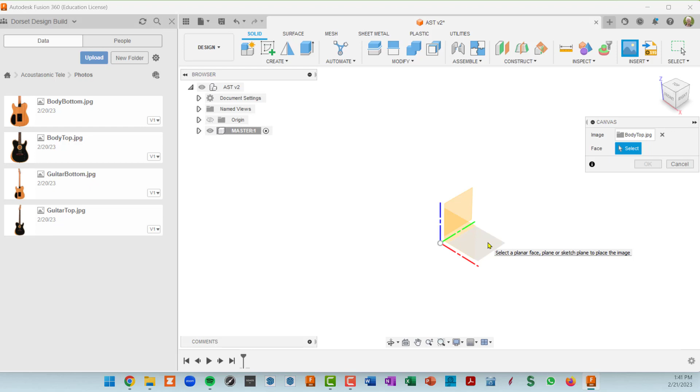So all I've got to choose from at this point is one of these 3 surfaces adjacent to the origin. I'll click on this top surface, scale it up so we can see it, and click OK.

But look what happened here - this canvas is not inside the master, it's inside the top level component. So I think to work around that, we're going to have to make something in the master that has a surface on it, and then use that to attach the canvas to.

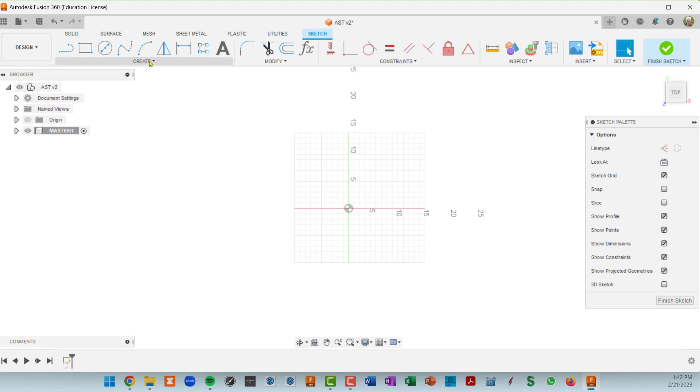So I'm going to undo a couple of times. We still have our master component, and I'll close down the data panel. I'm going to create a sketch here within the master component, and we'll do that on this same top plane. We get spun around here - there we go. And I'm going to create a rectangle, actually a center point rectangle.

I'm just going to roughly make this the size of the blank that we would need to cut this out of - size really isn't important here. I'm going to make it, let's just call it 14 by 20. By the way, I am in inches here. You can change your default setting in document settings, but I've got it set to inches.

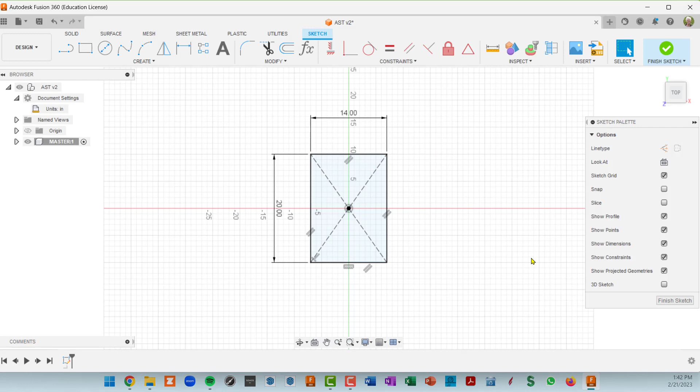Okay, so we now have a sketch. Let's open up our master, open up sketches, and double click on that slowly. I'm just going to call this temp - this is our temporary sketch just for the purpose of getting that canvas inside the master level component.

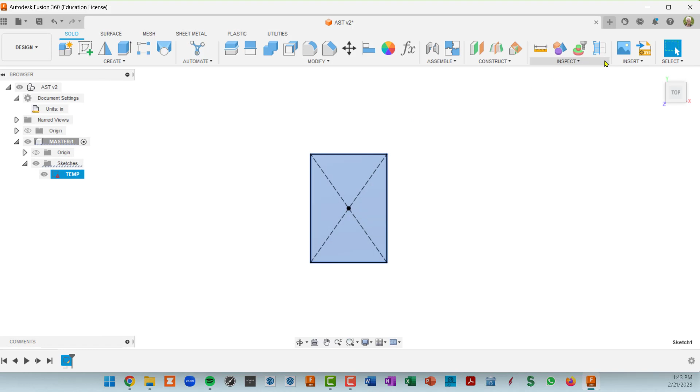So I'm going to finish the sketch, and now when I go to insert canvas and pick my body top image, I can select this surface right here. And when I do that, you'll see that we get something that is actually fairly well scaled to the rectangle that we just made, which is convenient.

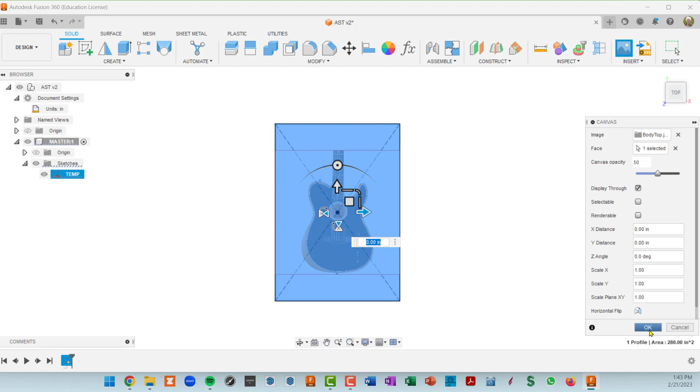So I'm going to go ahead and OK out of that, and we'll see now we have a canvas folder inside the master. So that's exactly what we wanted.

Now, the first order of business on the canvas is to scale this appropriately. And to scale a canvas, you right-click on it and go to Calibrate.

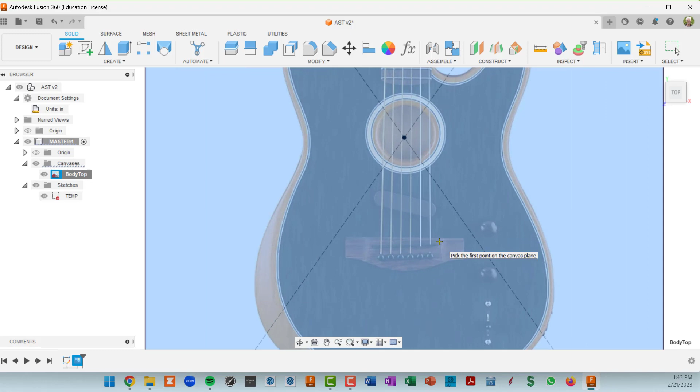Okay, and now I can zoom in, and I need a known distance in this photo. I think the distance I'm going to use is the string spacing at the bridge. So I can clearly see the strings, and I'm going to click here on the low E string where it intersects the bridge, and on the high E string where it intersects the bridge.

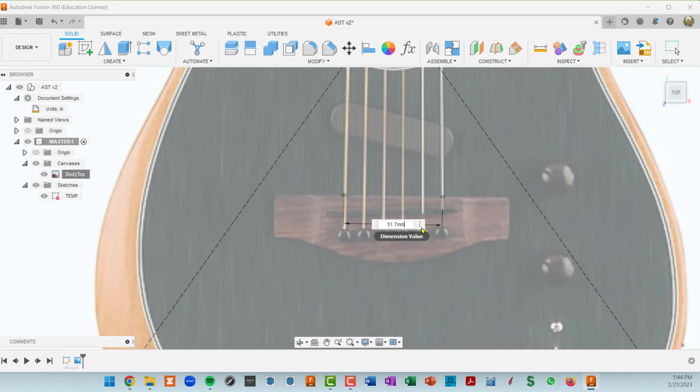And then I looked up ahead of time what this was supposed to be, and it's supposed to be 51.7 millimeters. So I've got to put millimeters in because our default value is inches. So that scaled things up.

And now let's take a quick look and see if that is anywhere in the ballpark.

And one thing we know is that this is a 25.5-inch scale guitar. I want to do a quick aside here.

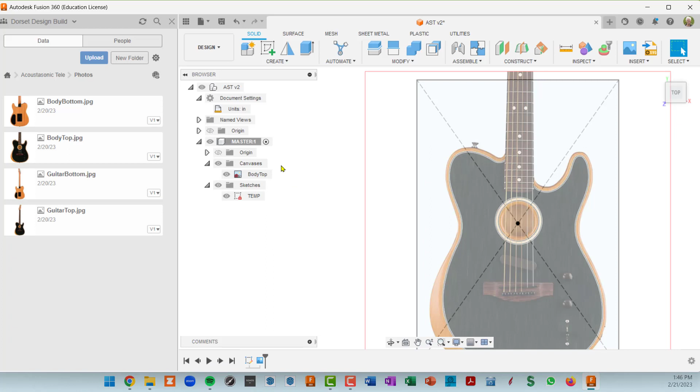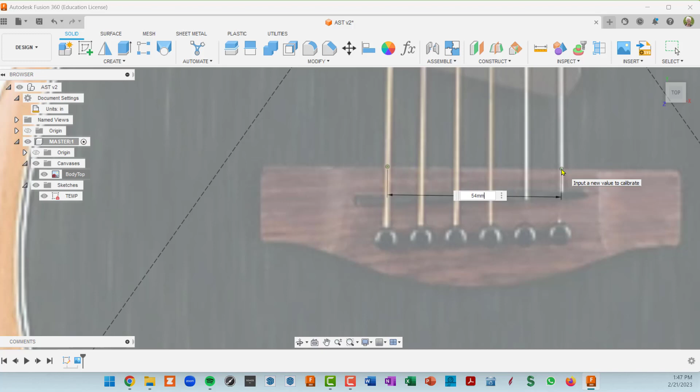Let me minimize this and go back to our Fusion file to recalibrate. I'm going to close the data panel and recalibrate the canvas. I right click on the appropriate canvas, pick calibrate, zoom in, and go from this low E string to this high E string, kind of the center of each. I'll type in 54 millimeters and press enter. That scaled things up a little bit more.

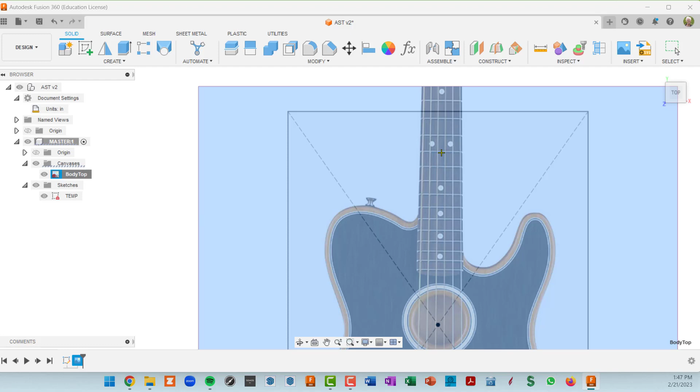What I want to validate here is that half the scale length should be the measurement from the 12th fret to the bridge. Let's go through the motions of doing a calibrate, but not actually apply it. I'll click on the middle of the 12th fret and go down, probably right here would be considered the start of the bridge. That's 12.85. We would want 12.75, half of that 25.5 scale. So that's pretty darn close.

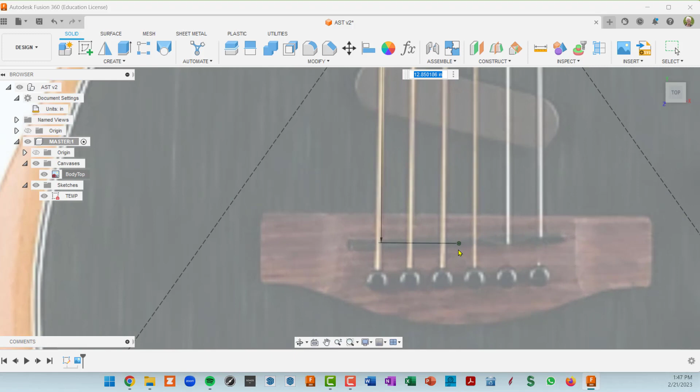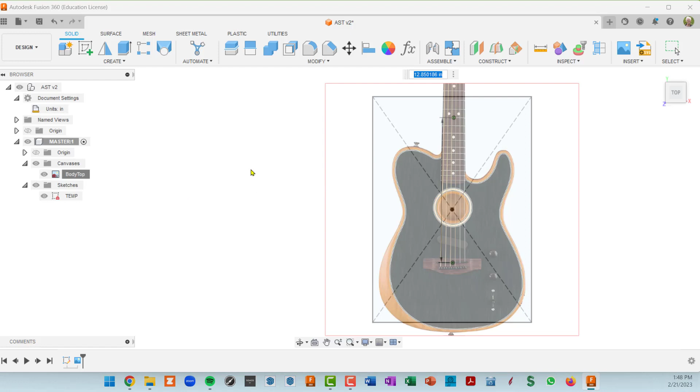So I'm going to stay with that scaling. This scaling is just for the body, so it doesn't have to be extremely accurate, but we will be extremely accurate when we get into fret spacing and how the neck aligns with the bridge, or vice versa. I'm going to hit escape, and we're not going to do that recalibration.

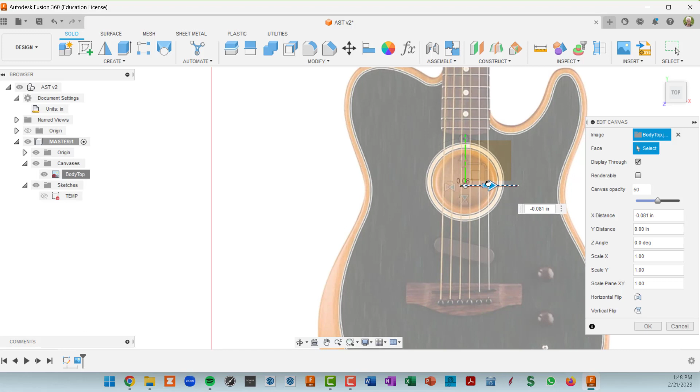Now let's hide our temp sketch and make a new sketch. Let's turn on our origin. You can see here that this guitar is not centered horizontally, so I'm going to right click on the canvas, do an edit canvas, and use these arrows to move it so that it is centered. Vertically, I'd like to center this over the center of the sound hole, so I'll go ahead and do that. Now the canvas is positioned so we can draw over it.

So in order to do that, we're going to make a sketch. We're in the master level component, so that's where our sketch is going to go. I'll click on New Sketch and click on this top plane. Now I think what I'm going to do is start by making some little helper lines, and we may actually have to rotate this canvas a little bit, but let's start with the helper lines first. I'm going to get a line here, starting at the center and going straight down to end right here at the butt part of the body.

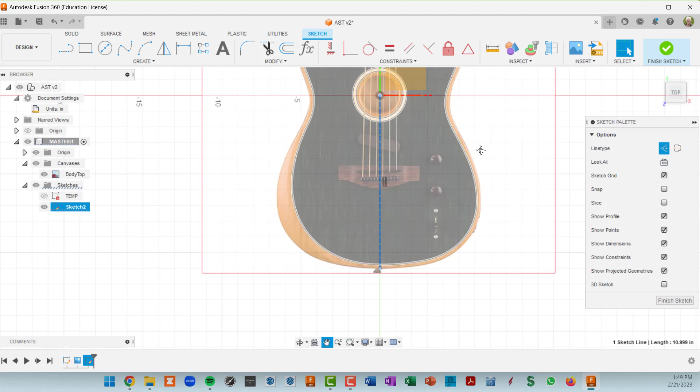I didn't turn on construction lines, so I hit Escape, click on this, press X - or I could have come over here and done it by clicking in the palette. But now I've got something that's a vertical line in our sketch, and you can see it kind of stays between the strings here, which is good. Let's do another one coming up from the origin, going straight up to this point, making sure that I am at 90 degrees, which you can see right here.

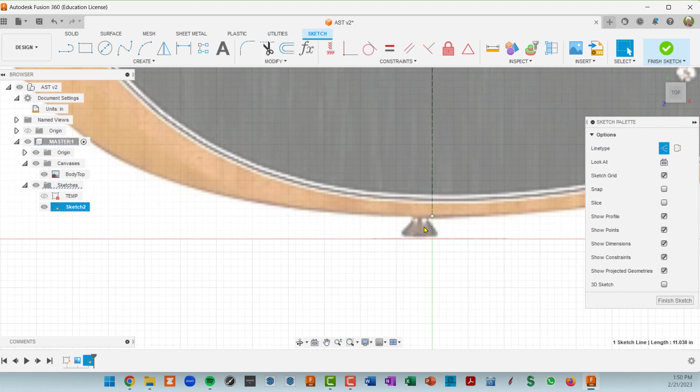Okay, I'm going to click on this and press X for construction. You can see that this is actually a little bit skewed, the canvas is a little bit skewed. It's right down the middle here, but as we come up here, it's a little off. Another thing that looks a little off is the strap peg is not quite in the center. That's assuming they put that in the center - I don't know, but I certainly would on my guitar.

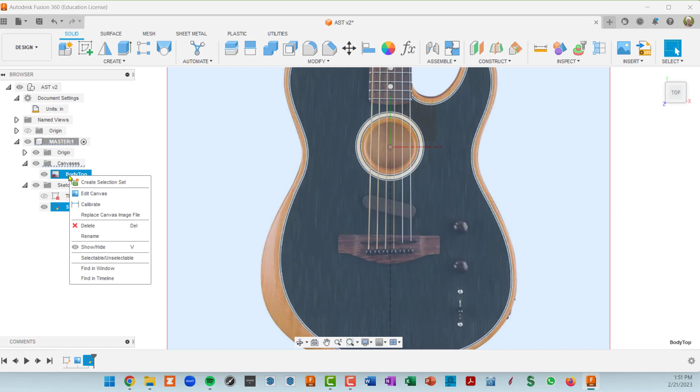So I'm going to rotate this canvas just slightly. Let's get out of our sketch, which has these two guidelines in it right now, and right-click on our canvas and go to Edit Canvas, and now we can do a rotation. But you'll see that if you try to do it with the control, it's going too fast. So what I'm going to do is just type in a very small amount here - let's say 0.5, half of a degree.

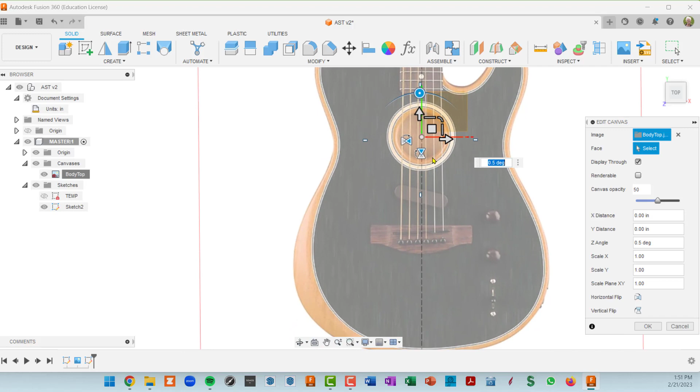And that looks much better here. We're going through the dots, we're still going through the strings, and it's actually not too bad down there. So I think I'm going to leave that. I'm going to OK out of that - so we did our slight rotation of the canvas.

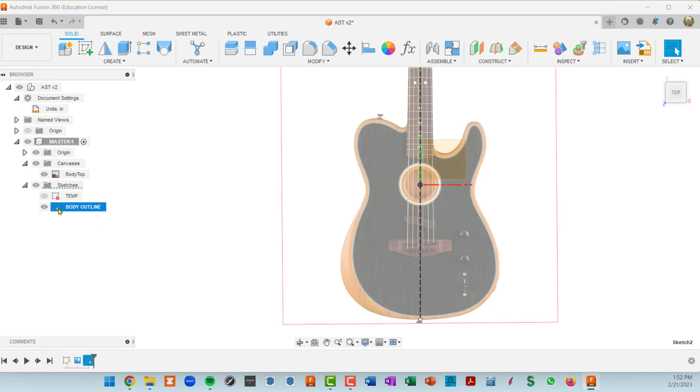Now, this was the sketch that we just put these two vertical guidelines in, so I'm going to slow double click on that, and I'm going to call this the body outline. All right, so we're going to go back into that body outline - I will double click on its little icon here to open up the sketch.

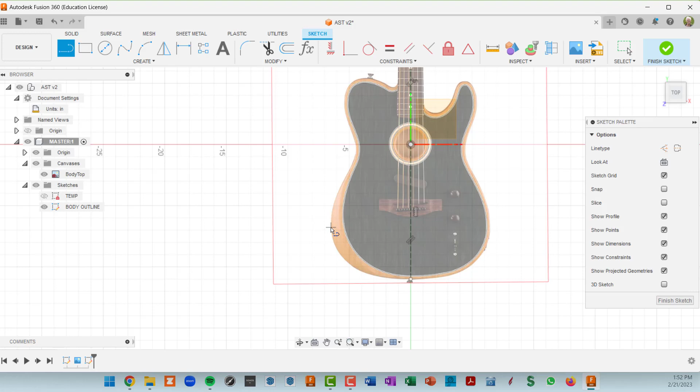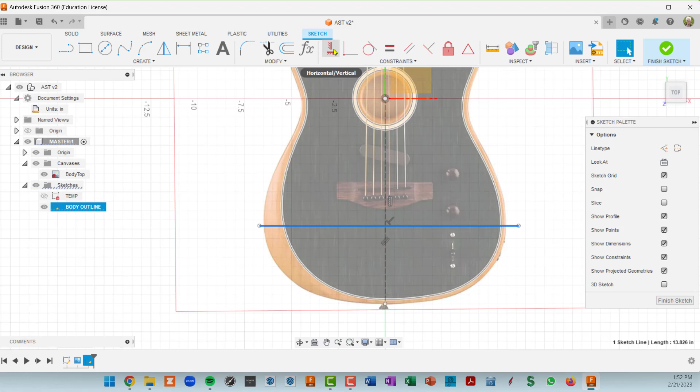What I like to do is add a bunch of guides. Better show you than babble here, but I'm going to get a line, and I want this line to be at the widest part of the lower bout. So I'm going to go actually a little bit too wide here, but the one thing I want to make sure of is that this is a horizontal line. You can see that it's at a right angle to the vertical line that we have there, so that is indeed horizontal. You can check by clicking on it and going up to a horizontal constraint, and it'll probably say it's over constrained - it's already constrained to be horizontal, which is good.

Okay, I'm going to click on that, do an X to make it construction. I'm going to go back to my line tool, and this time I'll pre-select it being construction. The next line I want to do is somewhere close to the waist - again, this is a little bit too big, but we're going to come back and tweak those. The third line is going to be the upper bout. It's really going to serve two purposes: it's going to be the maximum width of the upper bout, and it's also what I like to call the line of asymmetry. So everything starting down here, working our way up to this point, is probably symmetrical, and then these lines here, this part of the outline is obviously not going to be symmetrical.

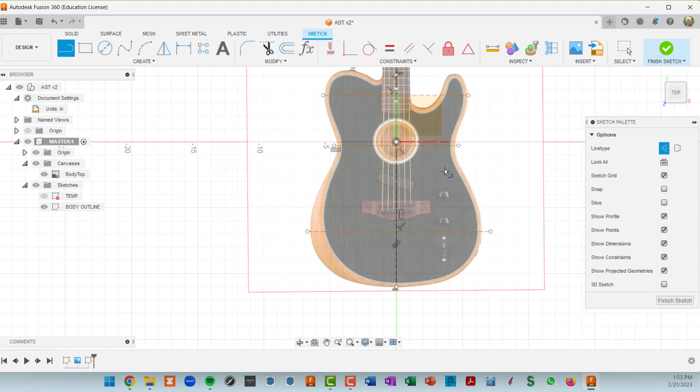So now that we have those three lines in, the important thing is they're already constrained to be horizontal, but I also want to constrain them so that they are centered on this axis. So the way I'm going to do that is I'll hit Escape, and I'm going to go up to this horizontal vertical constraint, which I like to think of as horizontal and vertical alignment.

Okay, so I'm going to click on this vertical alignment, and if I zoom in on this line and hold down my shift key, at some point I'm going to get an X. That X is the center of this construction line. So if I click on that, I'm saying I want the center of this construction line to be aligned with this point in the origin. And you'll see that it moved left a bit.

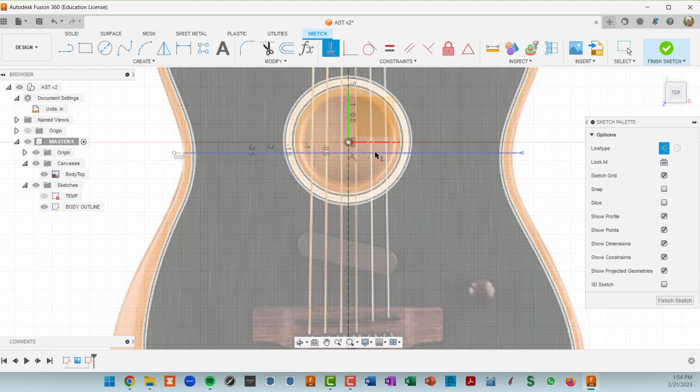So we're going to do the same thing with this line. I'm going to hold down my shift key, and as I hover over it, at some point I'm going to get that center X. When I do, I click, and then I click on the origin. So this one is now horizontally centered. And we'll do the third one, same thing - hold down shift, we'll zoom in a little bit so you can see it better. Hold down shift - this one's a little left of center.

There's the X, so I click, I go back to the origin, and I align there. Now I'm going to hit escape to get out of that constraint. Now you will see if I move this, look at the right side is moving as well.

So I can still move this line up and down, but it's always centered about the vertical axis here. So what I want to do is, now that I can size this and move this, I want to get this at the maximum width, which looks to me to be somewhere around there. Now this is the waist, so I'm going to move this up to where the minimum width is. Oops, got a little too narrow there.

Now you can see that this one's not extremely symmetrical. It could be that this body is not really symmetrical, but I'm going to make it symmetrical.

So let's kind of split the difference here, come out a little bit. Well, you know what? This line is a little screwed up here. I guess my constraint, I might have two lines here. Let me delete this. Oh, I do. That's what's going on.

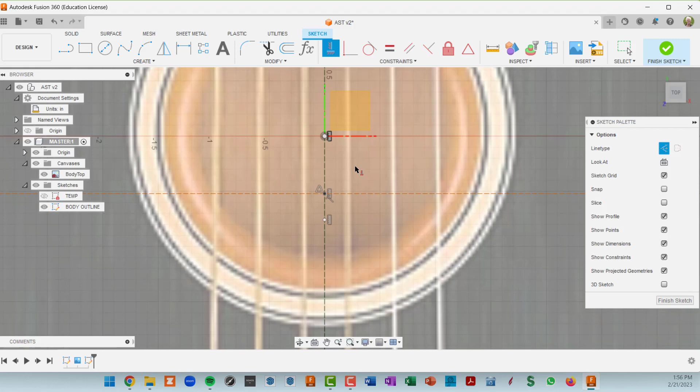I'll hit escape and then click on this and hold down the shift key. And at some point, oh, you know what? Let's go up and get our constraint first. So horizontal, vertical, hover over the line with the shift key down. If I zoom in, you can see there's the center, and I want that aligned there. Okay, so now I'll hit escape to get out of the constraint.

And now it's much more symmetrical. So, okay, that to me looks like the narrowest part of the guitar right there. I'm going to leave that line there. And we just have this last one to deal with. This one looks pretty good, maybe down a little bit. All right, so that's looking pretty symmetrical to me.

Except obviously the two upper horns are not symmetrical. Okay, so a couple more guides. We've got a point right here that we're going to start our tracing at. But I want a point right here and a point right here, which I will do by just putting a line there. So I'm going to click and come down with a short vertical line. Click the check mark. Same thing over here.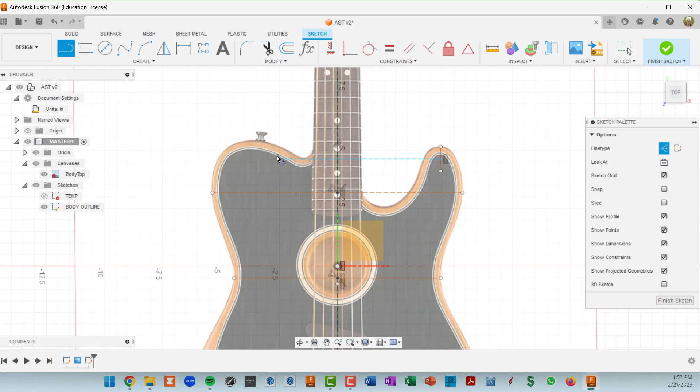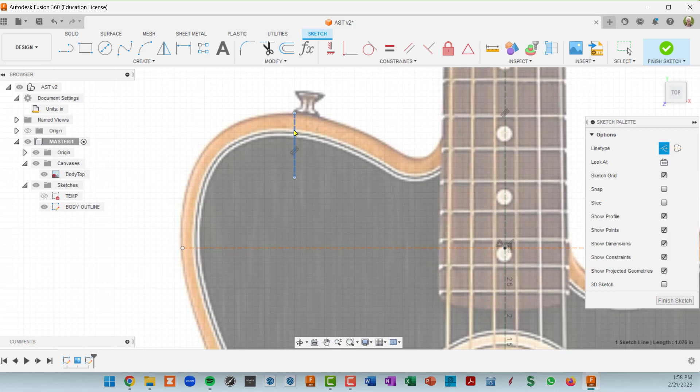So again, I'm trying to get the highest point on those horns. That's sort of where the transition point is going to be. So I'll hit escape here, and now I can move these lines around and really, once I'm zoomed in, hone in on what the real top spot is, which looks right about there.

Now, we do need another piece of information here. We need the back, because we can't see where this body crosses the neck, because the neck is obscuring it. So we're going to bring in another canvas, which is going to be the back, and we're going to need to rotate and align that to this front canvas.

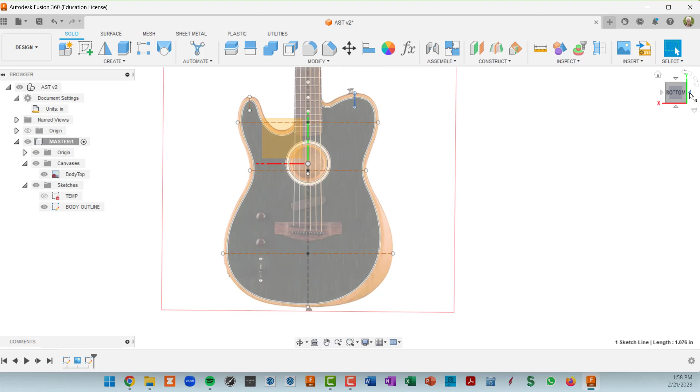So let's finish our sketch, and now let's spin this around so that we're seeing the back side, but we're seeing the front image on the back side. So we want another canvas here.

Okay, so let's look down in our timeline, and when we edit this sketch, which we're going to come back in and use this sketch right here, this body outline, here it is in the timeline. We're going to use that, we're going to edit that to do our outline.

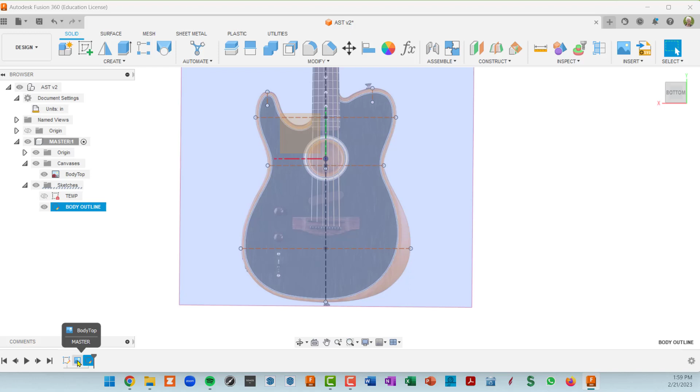We want to make sure that the canvas, the back canvas, is before this sketch, because anytime you edit a sketch, you're going back in time to when it was created, when it exists in the timeline, and then you're just changing the contents of it.

So I'm going to rewind the timeline, and that will allow me to insert the second canvas before the sketch. And you can see the sketch doesn't even exist in our browser anymore because we rewound the timeline.

Okay, so I have the master level component selected. I insert a canvas, and I want the body bottom this time. And I'm going to pick a plane to go on. And let's see, let's turn on our temp sketch.

That's going to allow us to get the canvas into this master level component. So I'm going to click there. And now you can see it needs to be scaled a bit, but it also needs to be flipped around.

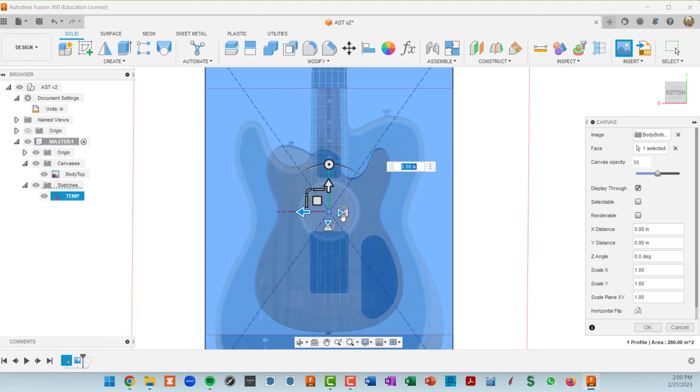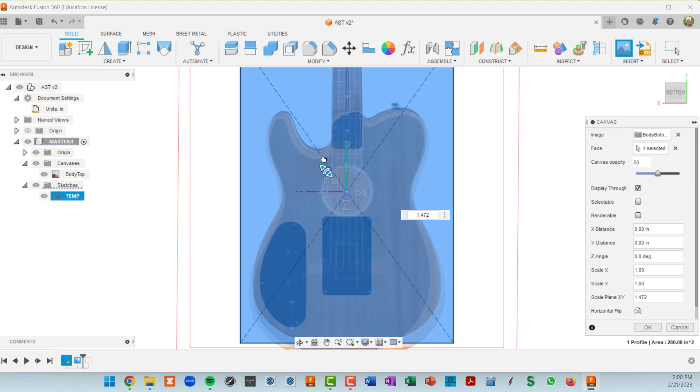So I'm going to use this handle to flip it so that it matches the back side of the front canvas image. And now if I use this handle, this is a symmetrical scaling. I want to stay away from this and this because those are vertical and horizontal only scaling. So I'll do a symmetrical scaling, and you can see we kind of got it within range here. But a little tough to do this, to make this match.

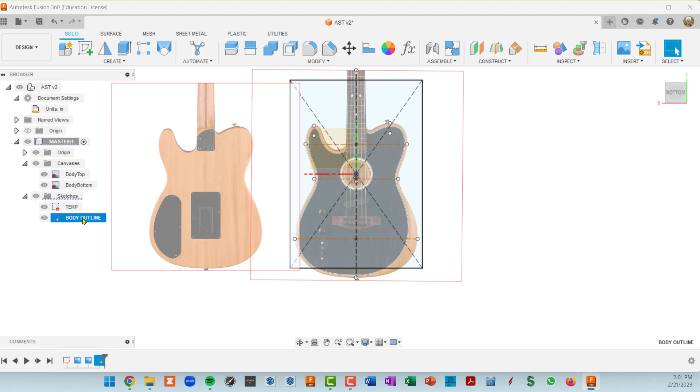So I'm actually just going to put it over here for now and show you a little trick that I like to align front and back sketches with. So I'm going to do an OK, and I'm going to right click on this and do a calibrate. But before I do that, I want to change our timeline back so that we can edit this body outline sketch, and double click on this, and there it's open.

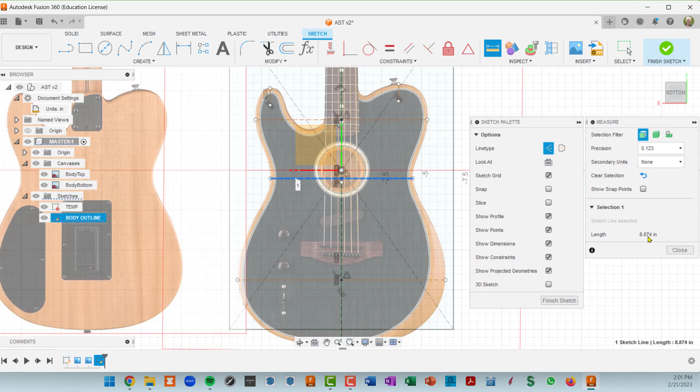What I want to do is do an inspect. So generally I like to just press, oh here it is, I for inspect, but it goes to the measure dialog box. And if I click on this waistline, I've got a length value right here in this measure dialog box. So if I simply click on that value right there and close it, Fusion puts it in my copy paste buffer.

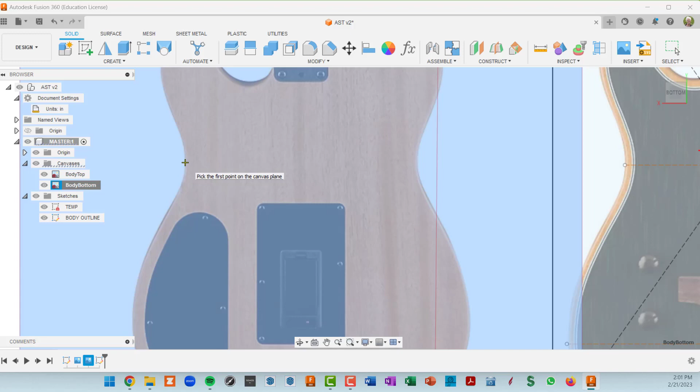So now if I go back to calibrating my canvas, I can go into this canvas and try to do a waist, get as close to the narrow waist as I can, and click and click. And now what I'm going to do is a paste, Control V, and there's my value. And now the canvas got scaled to that waist value.

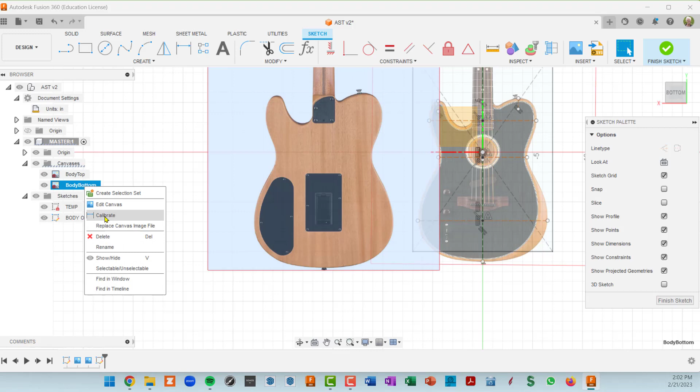So now when I right click on the body bottom and edit the canvas, I can move this so that it should look like the right size there. And boy, it doesn't look right at all, does it? Let's try that one more time. So I'm going to OK out of the edit. I want to click here to look at the length, which is

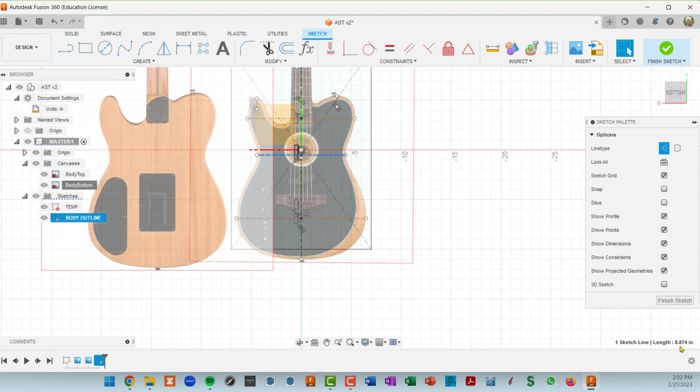8.874. Okay, so I'm going to go into my body bottom, and I'm going to calibrate, and I'm going to go from this point here on the waist to this point here, and type in 8.874 and enter. Okay. I don't know why somehow I screwed that up the first time, but now we can right click on the body bottom, edit canvas, which is going to allow us to move it on top of the other canvas. And this looks pretty good.

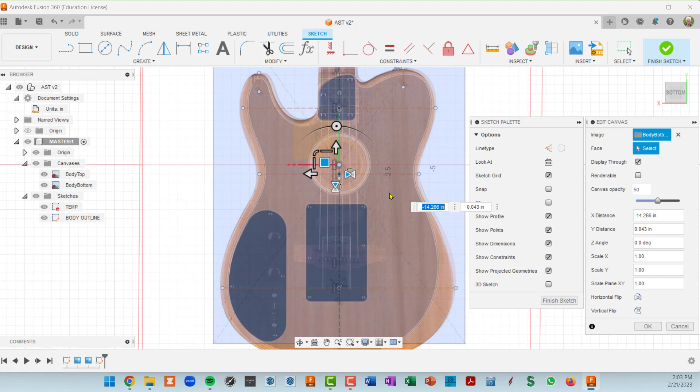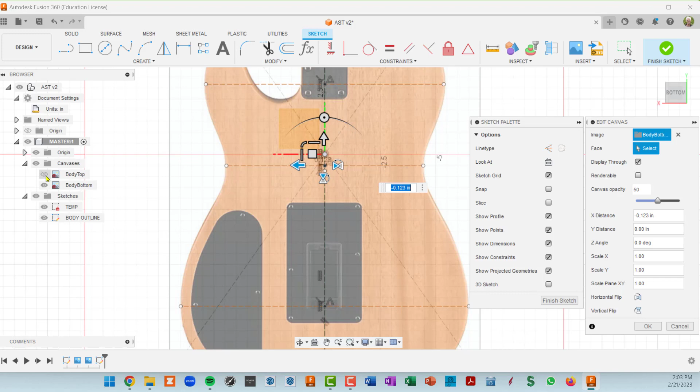I'm actually going to center it real quick. So what do we have to do to center it? Let's hide the other one, the body top canvas. And now I can move my horizontal arrows and get that center of that neck right where we want it. And now let's turn the other canvas on and see how close we are. It looks pretty good. All right. So I'm fine with that. So I'm going to do an OK.

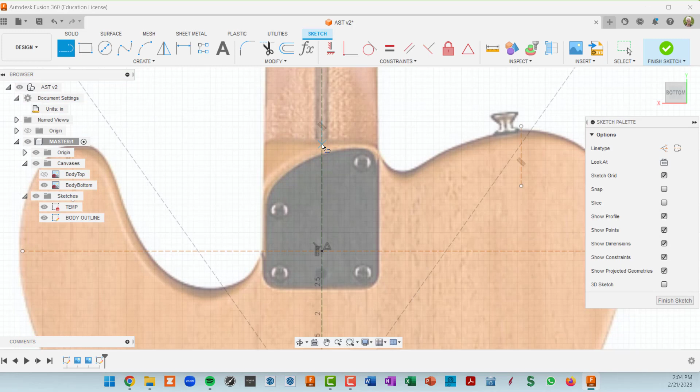And now we want an additional guideline inside this body outline sketch. So let's finish the sketch we're in. Double click on the body outline sketch, and we've got a center line, which is great. So I'm going to hit L for line, and I'm going to start right here, making sure that I'm snapping to that middle, and I'm going to come out to the edge of the neck. And this is something we may want to come back into this sketch later on when we extrude our neck to make sure that this neck pocket is wide enough.

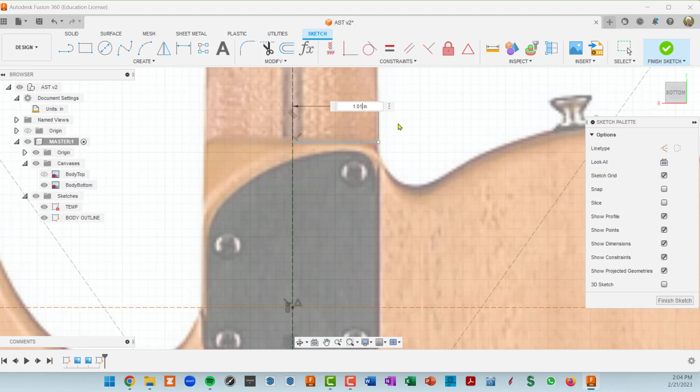So I'm going to click here and do an OK, and I'm actually going to put a dimension on this. I don't care what that dimension is just yet, but that'll allow us to come back at a later time. I'm going to make this 1.008. I'll make it 1.01. Okay, so we can come back into this sketch and change this, and everything will accommodate it, hopefully.

So I'm going to get another line. Again, I'm going to start right here in the center, and I'm going to come out. Now, I could type in the same distance here, but I'll show you a little trick. I'm going to go up to my constraints and get the equal constraint. Tap on the line that I first did, tap on the second line, and now they are equal in length.

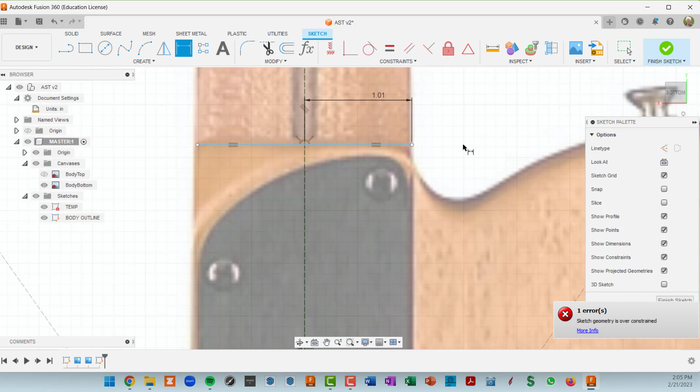So if I do a dimension on this, you can see that's 1.01. If I clicked here, it's going to say it's over constrained. Yeah, so I'm going to cancel. Okay, so now we have two horizontal lines where this neck pocket starts, essentially.

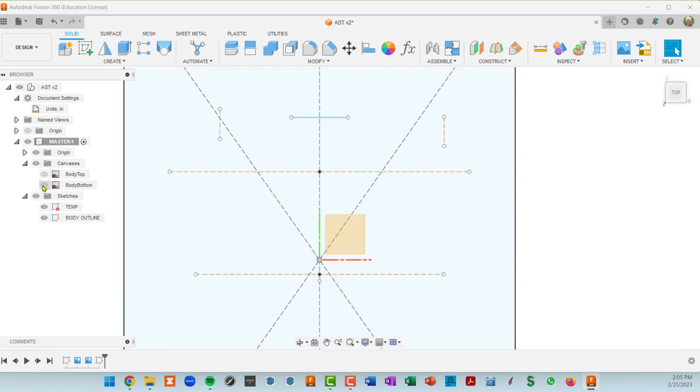So I think at this point, I'm going to exit this sketch, finish it, and let's come around to the front, and let's hide the back canvas and show the front canvas. And now we have that piece of information that we needed. And it's kind of in between these two frets, so that's probably very accurate, or close to being accurate anyway.

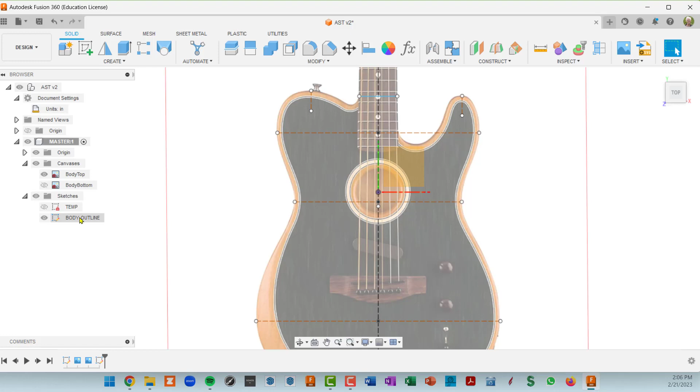All right, so now I'm going to hide this temp sketch, and we're going to go back into body outline. Now, when I double click on this, we're rewinding the timeline back to this sketch, which we're really not rewinding it because it's the last thing in the sketch. But you see that we needed this canvas before the sketch in order to get that information. So that's why we did the timeline manipulation.

Okay, so now we are going to start sketching the outline finally. So I'm going to start with an arc and just show you how an arc's not going to work. So I'm going to start here. I'm going to make sure that I get a square, which means I'm snapping to that point. And now as I try to put down an arc somewhere, you can see that's not really an arc, not even close. So I'm going to hit escape, which means we're going to have to use splines.

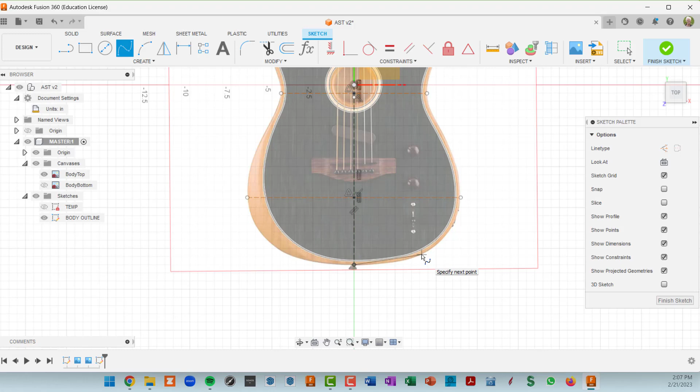So I'm going to go into my spline tool. Again, click right here where I'm intersecting. Now, I'm going to click on each one of these points as kind of a transition point of this continuous spline, but I also want to get a point halfway in between or somewhere close to that. So I'm just going to click here, then on my guide point, then I'm going to click halfway, on my guide point again, halfway again on the guide. Now that's going to be my last one. So I'm going to click on the check mark.

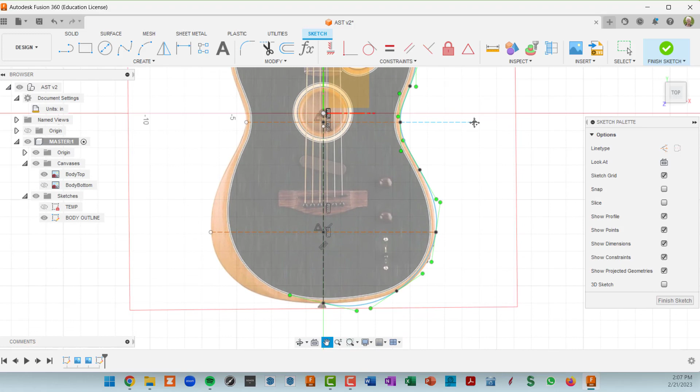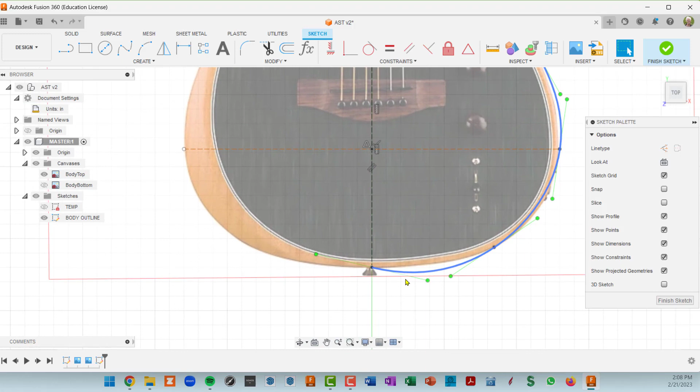And you'll see that actually the curve is not that bad. But the reason I stopped here is this is where our symmetry stops. Remember, I was calling this the line of asymmetry. So when I do a spline like this on a guitar body, the things I like to do are, first I'm going to hit escape to get out of the spline tool. I like to make any transition points, which would be this point here, and this point, or any points that are at the end of the spline, I like to make their handles either horizontal or vertical.

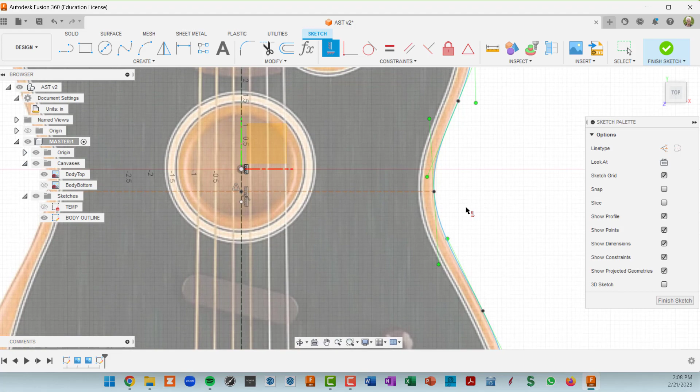So in this case, I'm going to click on the handle and make this horizontal. So what's going to happen is when this spline is mirrored on the other side, it's going to be a nice tangent transition between the two. So I'm going to make this one vertical. I'm still in that horizontal vertical constraint. This handle right here that goes along with this dot is right here. So I'm going to make that vertical and make this one vertical. Okay, so I'm going to hit escape to get out of that constraint.

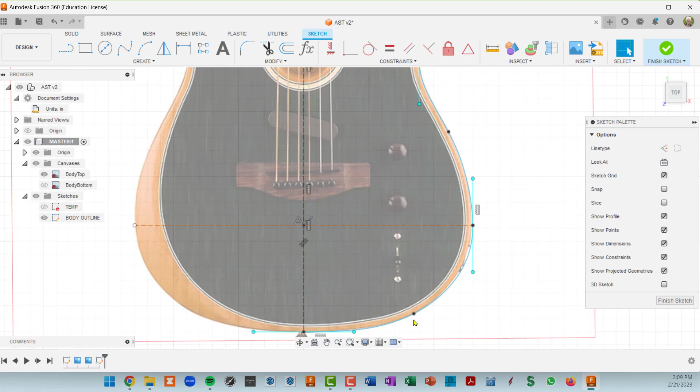So now you can see just by doing those two things, this spline is pretty close to the body. And the next thing I would do is just kind of move the points around if necessary, if they're not quite on the body. But these points actually all look pretty good. Maybe this one's a little bit out. Okay. So the next thing I would do is to change the handles. This one, although I've constrained it to being vertical, I can still change its size, its length. So I'll go ahead and do that. Same thing here.

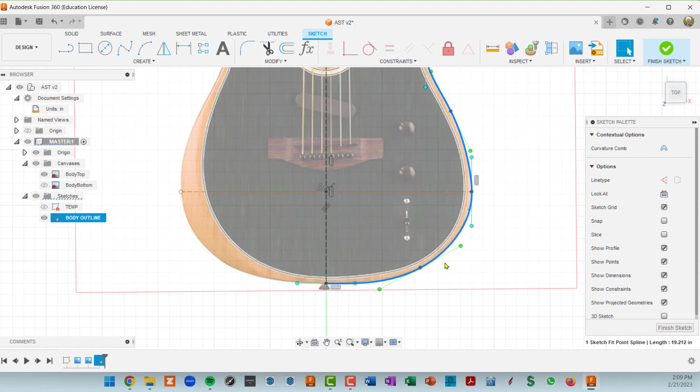And just by changing those two, we've got this looking pretty good. I don't think we need to do much there. That's pretty tight right there. To me, that looks pretty darn good. So once you've got a spline that you like on this side, we're going to mirror it over to the other side. So I'm going to go up to the mirror command, and I've already got the spline selected, and it shows up that way in our dialog box.

Now I have to click here to select the mirror line. I can pick this line, but I want to be super safe on any mirrors. I like to use the origin when it is the center of what I'm working on. So I'm going to click on this green origin line, and now we should see that curve being previewed over on the other side, and it looks good. So I'm going to click OK. And these constraints are mirror constraints, which a lot of times is a little bit too much information to really see what's going on here.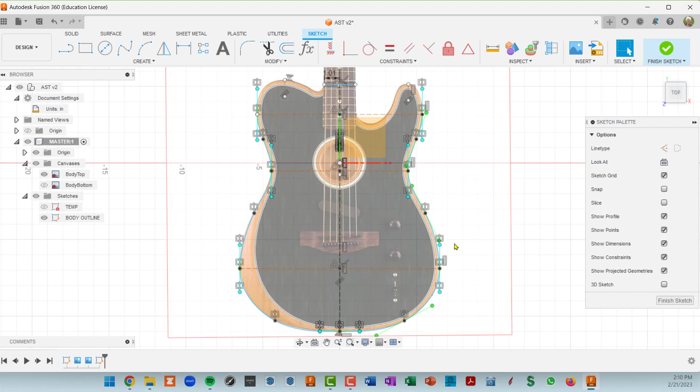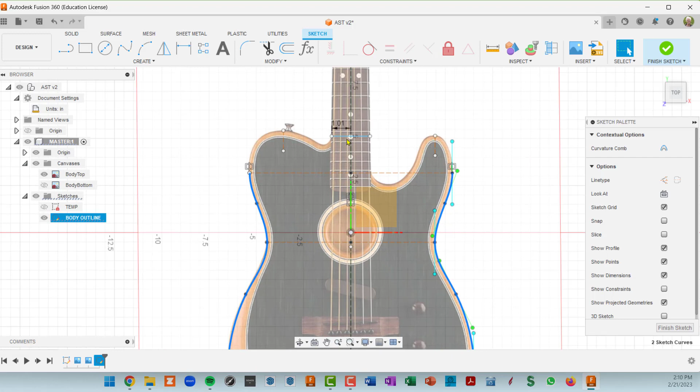So I'm going to hide my constraints, and now we get a better idea of what these splines look like. So I'm just going to click on one spline, click on the other, and you can kind of see we've got a nice shape that matches the photo really nicely. So now all we have to do is do a spline here up to this line, do a vertical line down here, and then do a spline over here.

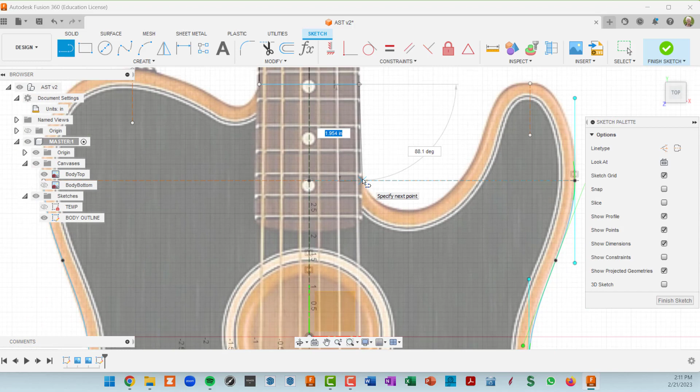So let's go ahead and start with the vertical line. So I go to my line tool, and I'm going to make sure I intersect there, and I'm going to come down to where that curve starts. And I want to make sure that this is, actually I'm not sure if this is vertical or not. We'll probably have to come in and modify this because the neck flares out a little bit on the way down here. So I'm just gonna have a slight angle to it. If I zoom in here, I'll put it right there.

Okay, now I'm going to get my spline tool again, make sure that I intersect with that line, and I'm going to come down to the bottom of this trough, halfway up to the top. We might need another one right here. Intersect there, halfway, and then intersect there. Okay, so that looks roughly pretty good. Let's go ahead and do it on the other side.

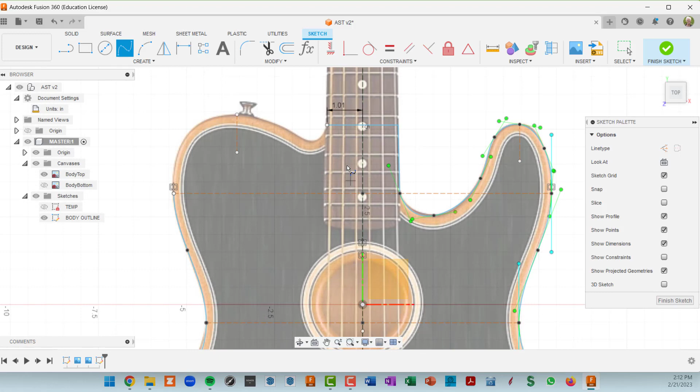So I'm going to start here on the line, come down to this trough, then let's see, I'll probably do one here, halfway up, one at the top of our horn, halfway here, and then intersecting our spline down here. Okay. So again, remember the sequence to do here.

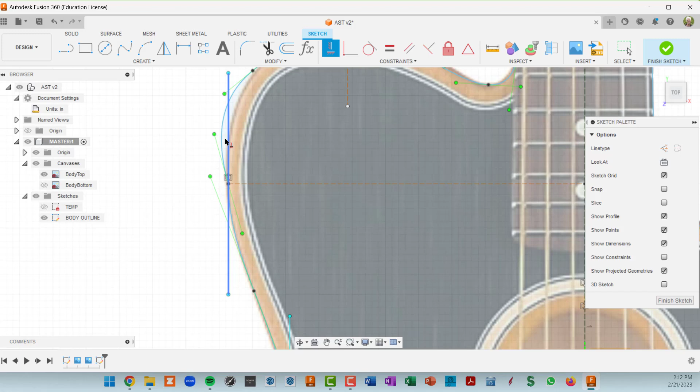The first thing you want to make some of these control handles horizontal or vertical. So I'll go up to that constraint. This is the one that I want to be vertical. So now we have a nice transition between this spline right here and the upper one. Okay, let's see, right here, do we want a horizontal? Yeah, that looks good.

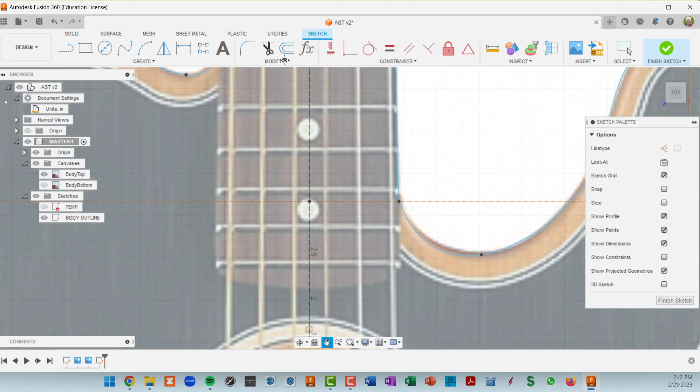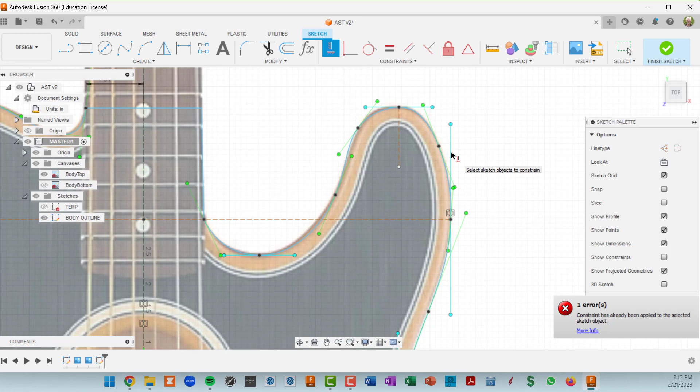And right here, we want this one to be horizontal. And at our peak here, this is going to be horizontal. And our last one that bridges to the other spline, let's see, this point's control handle is right here, and that is already horizontal, but let me click on it and make sure. Oh, that one is already horizontal. This is the one I wanted to click on. Okay, there we go.

All right, so now I'm going to hit escape, and let's hide the canvas. We can hide all canvases, and we're going to hide the origin, and there is our outline, and it looks pretty good. So you want to make sure that you've got a closed outline, and the way you tell that is when you hover in the middle of it, you get a profile that gets selected. So I'm going to finish our sketch, and we're almost done here.

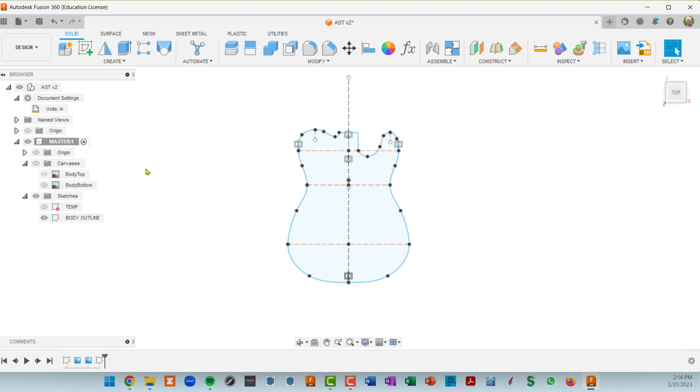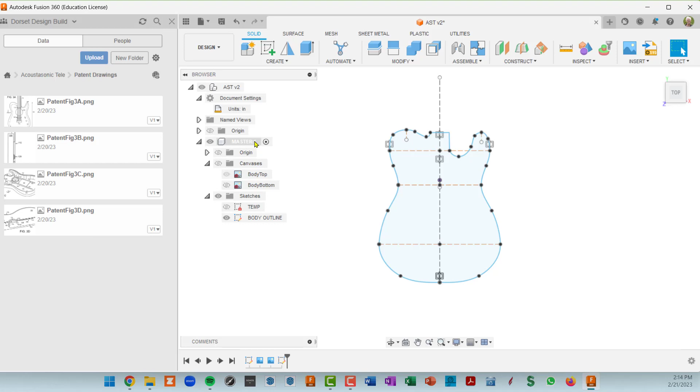But one thing I want to do, kind of just for yucks, is I want to go back to my data panel and go to the patent drawings, and there is a body drawing here that I want to see just how closely the patent matches the photograph. So we are going to bring in another canvas. So we're in the master level component. We're going to do an insert of patent figure 3A, insert that, and then we're going to pick this body.

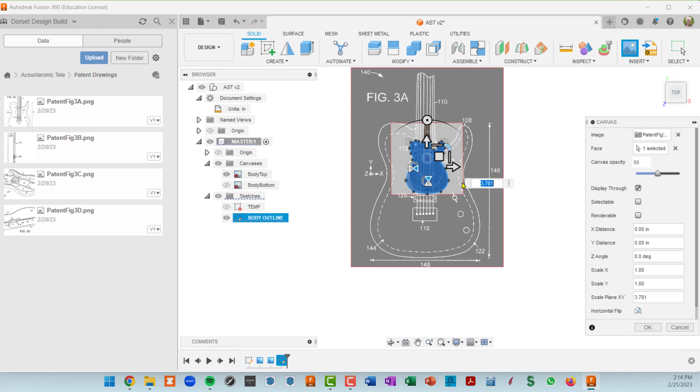And let's go ahead and just use this symmetrical scaling. We're not seeing anything because I hid the canvas folder. So let's go ahead and unhide the canvas folder. And there's our new canvas, which is way too big. So let me make that a little bit smaller. Again, I'm using the symmetrical scaling handle. So that looks pretty good up there. And let's go ahead and do an OK and take a look.

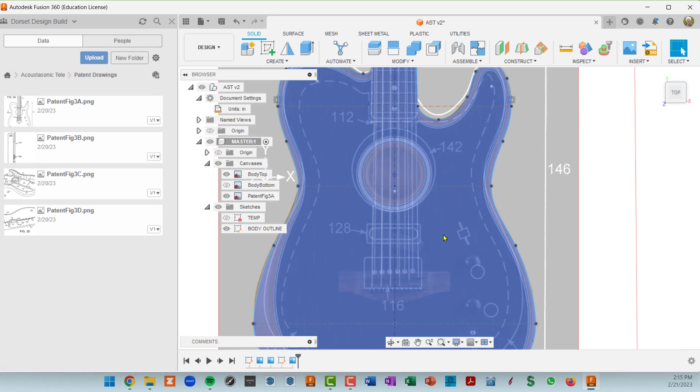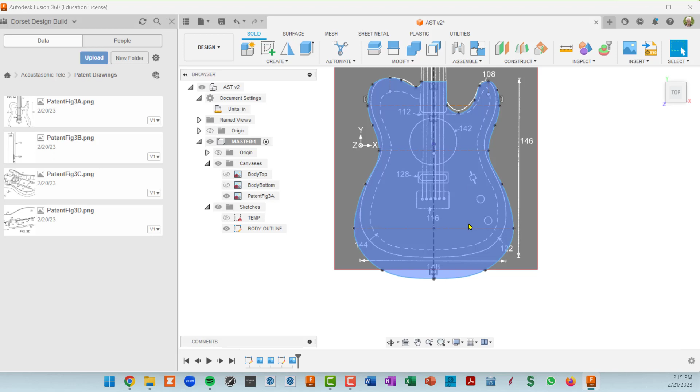If we zoom in here, we can see that it's really very different. The horn shape's a little different, but what's really different is the bottom of this guitar is really cut off in the patent diagram. Let's hide our canvas and you kind of see that here's our blue line that we sketched around. That's our body outline, and there's the patent drawing. So either they changed the design after registering the patent, or they didn't really want to put an accurate drawing in the patent. Not really sure.

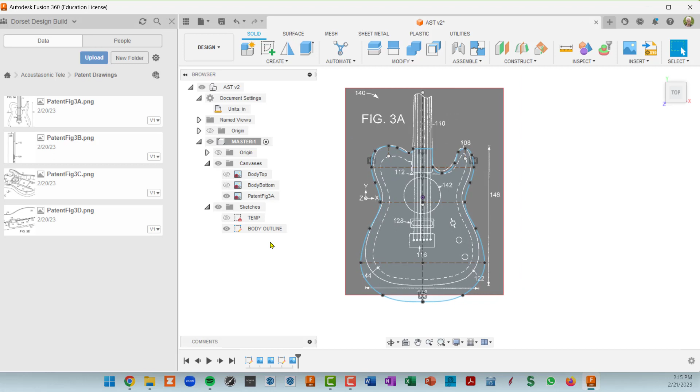Interesting thing is that the sound hole is also way too big. So anyway, we're going off of the photograph, not the patent. So I'm going to actually hide this. We don't really need that. And so that is the first video. We've got a nice outline of our guitar, and we will work from there.